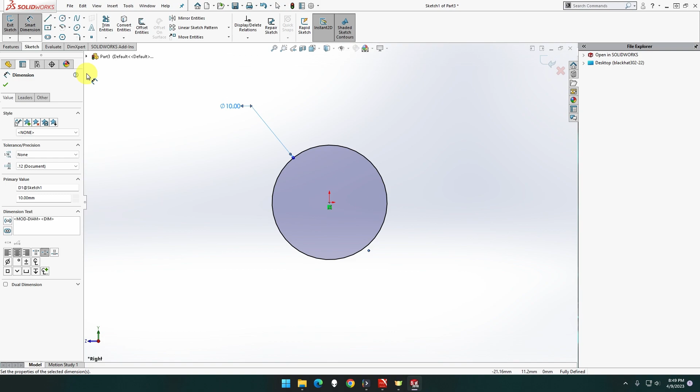Let's go File, New, Part MMGS. We'll go to the right hand plane, circle. There's a hole in this, but I'm not going to put it through yet because it goes through the whole lot at the same size, so we can do that in one go. This circle will be 10 mil, with a length of 10. I'm not worried about mid-plane on this one because it doesn't really matter.

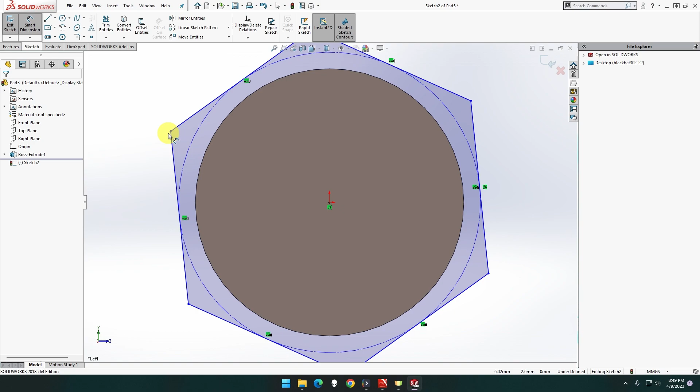This is brass, I'll leave this. Normal sketch, hex, smart dimension - sorry about that - and that's going to be 13. That's going to be feature extrude, 3 mil thick.

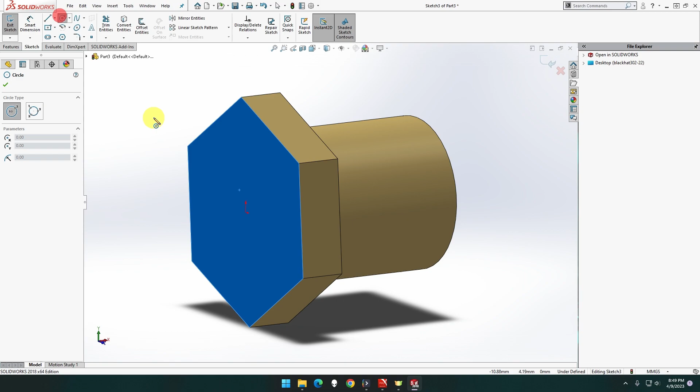There you go. Now again on this one, I'm not going to normalize that. Circle, and that's going to be 8 mil, extruded out 6 mil.

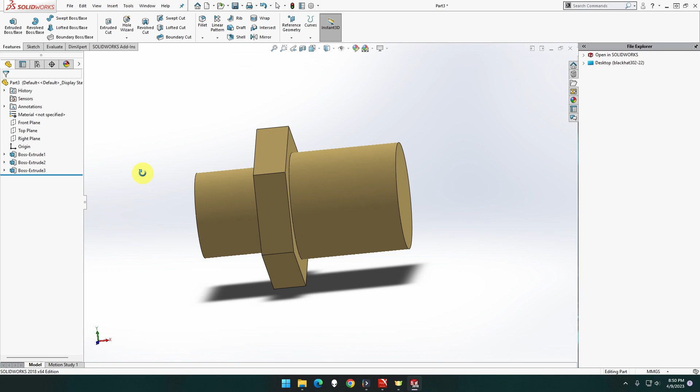Now that part's done. Now we want to go in a circle, doesn't matter which end you go. It's going to be 5 mil feature. Smart dimension - 5. Yeah, 5. And that's going to be through cut, through all, and done. Right, that hole's done.

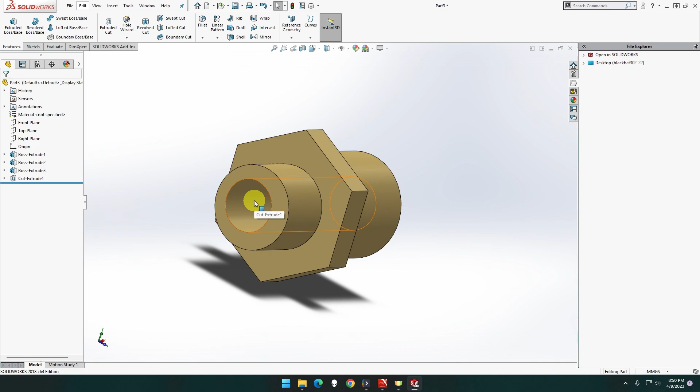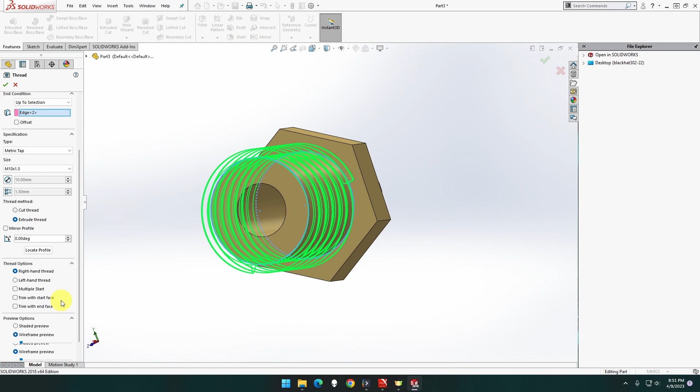Now we will need - interesting, got a thread there, that thread goes all the way through, and a thread there too. Okay, do this one first. M10 thread - yep, M10, so we want start there, finish there. That's going to be extrude, trim and trim. No, one of those doesn't do anything, but I'll just do both. I've got the right one.

Okay, that one's good. Now 8 and 5. Let's do 5 mil first, because 10 is above 8 but starts with 1, so therefore it's less than 5 in the list, if that makes any sense. Okay, so we want thread - yeah, see here, 1, 2, 3, yeah, so 5. And 5 by 0.8, that's all we got. Okay, so we got to go by that. Can't do much better then.

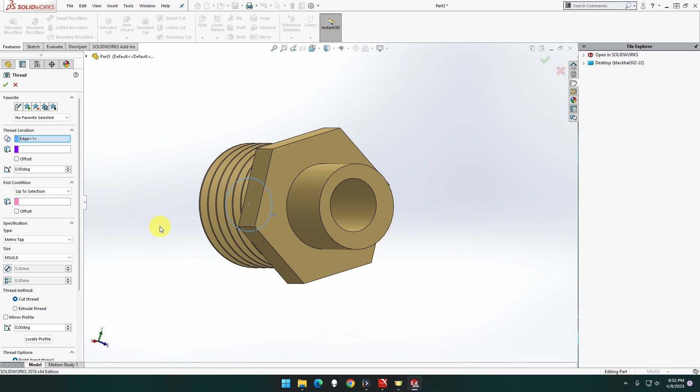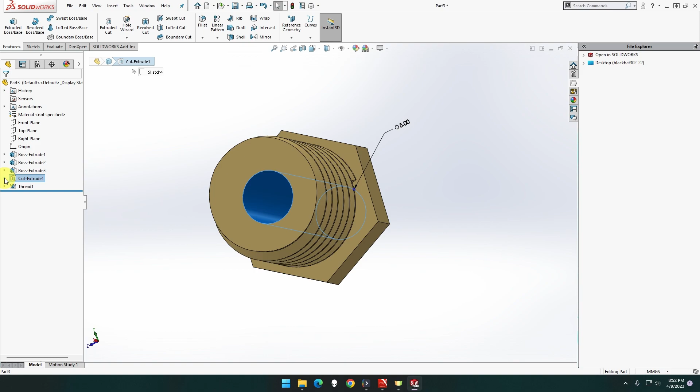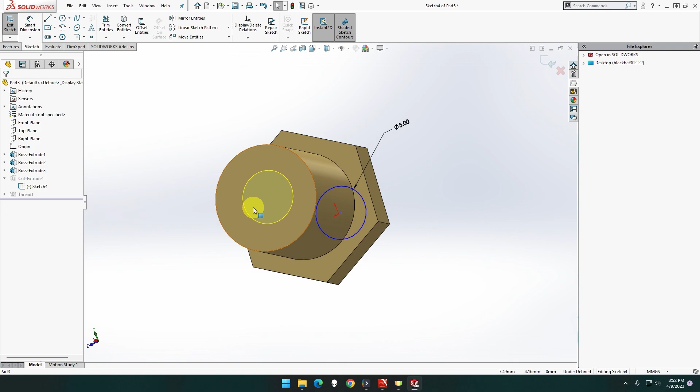Hold on, stop that a minute. That one there, let's delete. What was that? Actually, what was that center? I made a mistake there somewhere. Open that sketch up. Okay, that does it. Oh, wrong end. Yeah, something was right. Okay, you know what, how the heck did we get that far out? There's nothing there blocking that one.

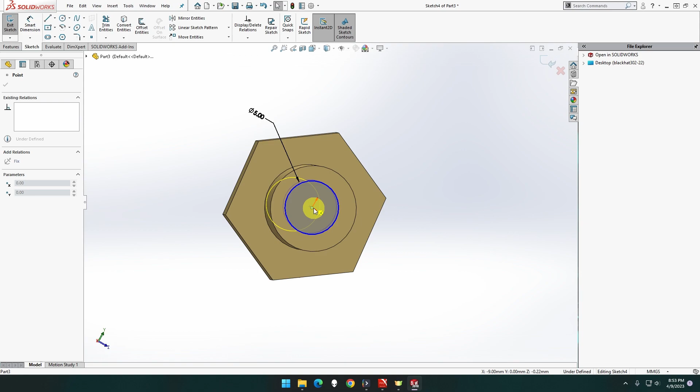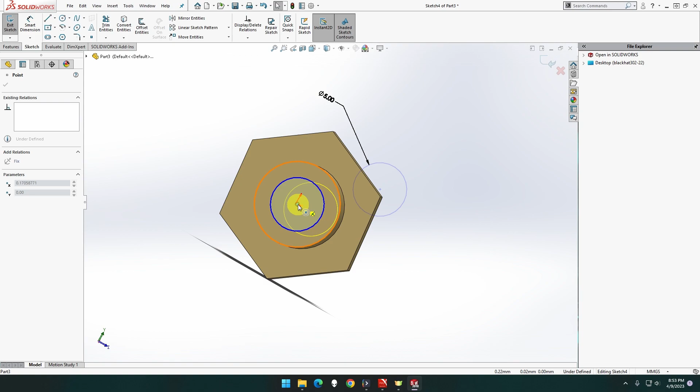Okay, let me just do something. Let me go to... move that one out. Yeah, that should be right. There's some reason I didn't link up those two. Face, nope, I want a point. Okay, let me just click on there. There we go. Exit. That's better. Yeah, I didn't realize I didn't click on the end there.

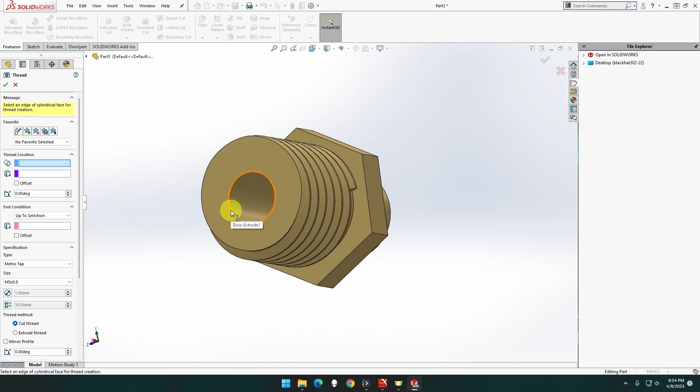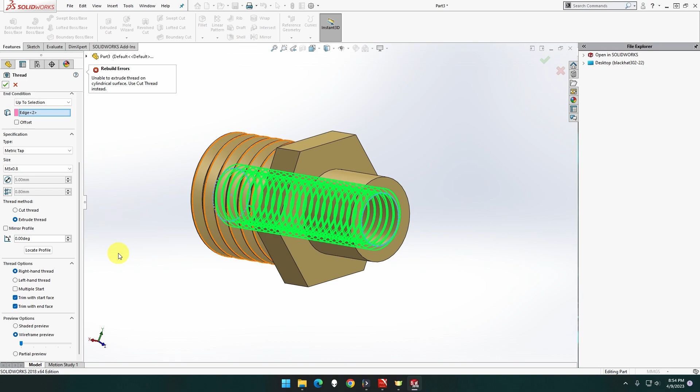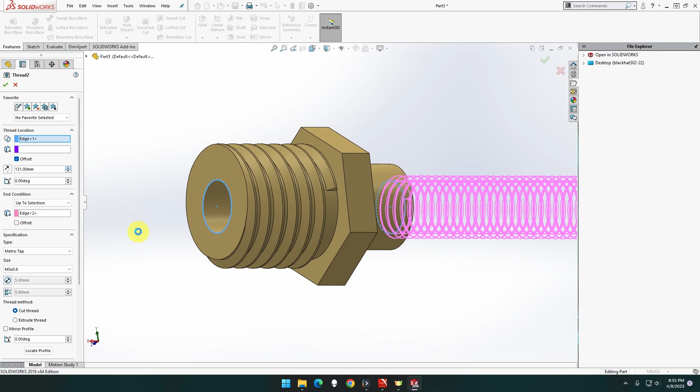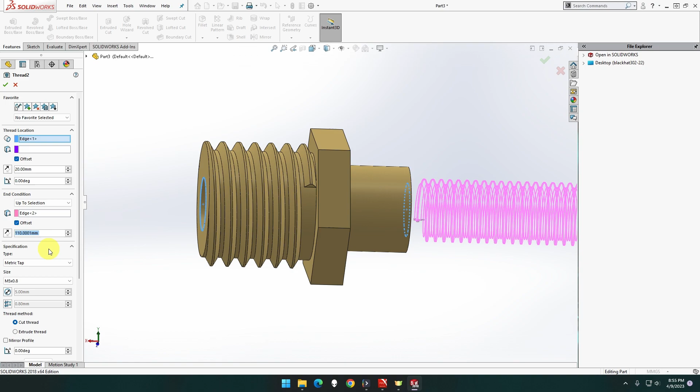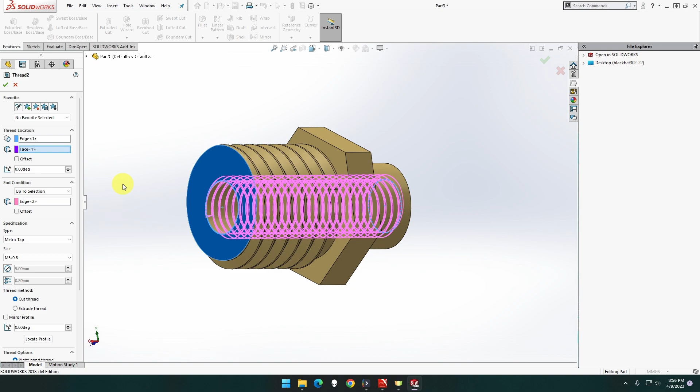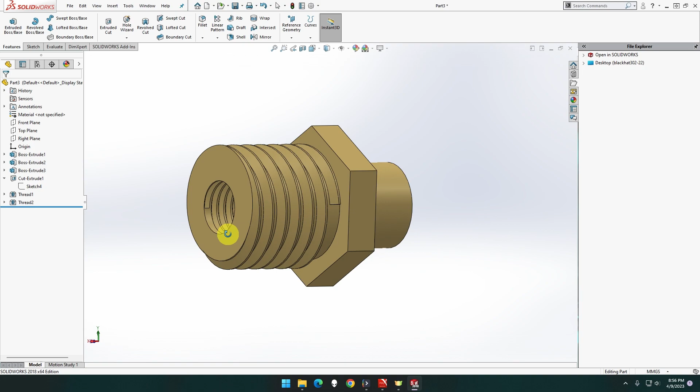Now, there's a way you can make that go past the end there. The problem with offset is... I wonder if I go 10, how long is that? 19, say 20. That's past there. If I go offset 20, negative 20 - I don't think it's that, does it? Nope. Yeah, it goes that way. Okay, forget about that, forget about that. Yeah, some way - I thought I found it, but every time I try to use it, I couldn't work it out. So that thread should go all the way through. So if anyone knows how to do that, let me know - I'll be happy to pass the information on.

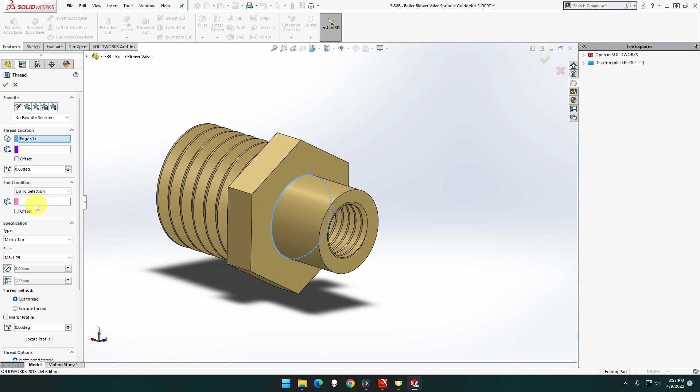Okay, let's do this thread. It's going to be M8 thread. Where are we? M8, 1.25. Start there. Offset - not offset, sorry, end condition there. That's going to be extrude, trim and trim, and done.

So that's part 3-38B, the boiler blower valve spindle guide nut, done for the Clayton Undertype steam wagon.